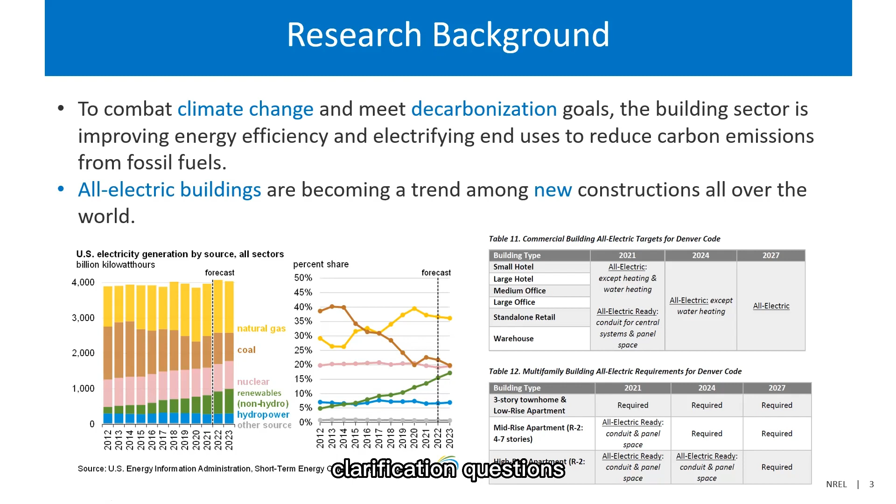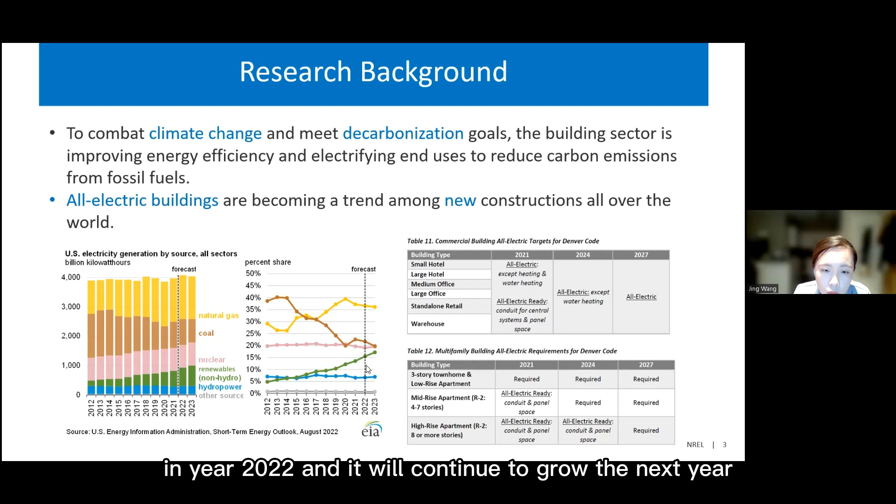So this figure on the left-hand side, from EIA, shows the short-term energy outlook, and it shows that the renewable energy for all electricity generation in the US is increasing every year, already 15% in year 2022, and it will continue to grow next year to almost 17%.

So if our buildings become more dependent on the electricity grid, then the emissions from the electricity used by these buildings will become cleaner. Therefore, the emissions will get reduced. That's the whole idea behind this electrification of the building sector.

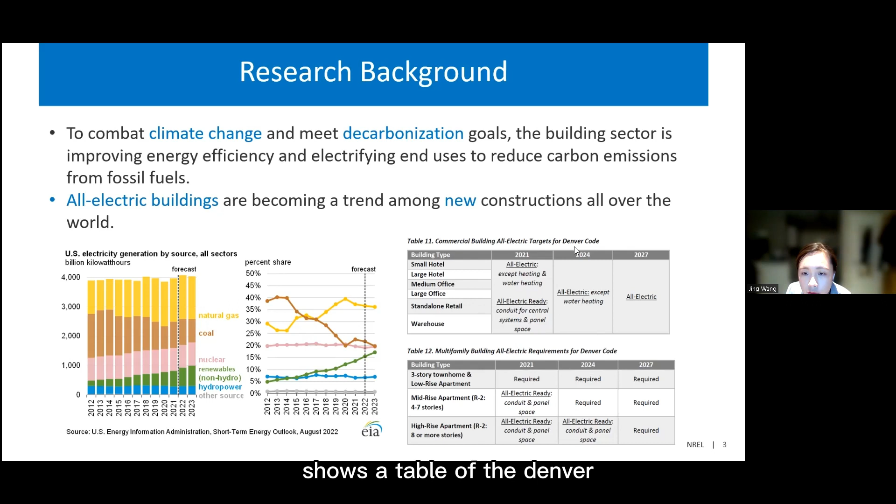So therefore, all electric buildings are becoming a trend among new constructions all over the world, not only in the US, but also in Europe and in China too. This shows a table for Denver, because NREL is located in Denver, Colorado. I took these two tables from the Denver code, and this shows by code regulation, in year 2027, almost all commercial building types need to be all electric.

And also for the residential sector, it's the same for multifamily buildings. So that really proves the trend of all electric buildings in the future.

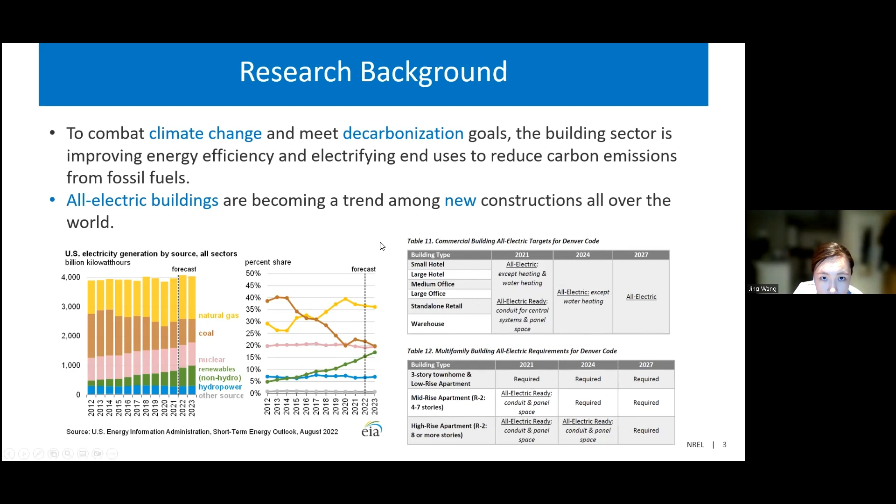This is the broader background of this work, because this work is part of the AUMC project at NREL. This AUMC project is to develop coordinated control of communities of buildings, fleets of autonomous vehicles, and intelligent infrastructures to maximize their operational value and contribute to the future grid.

In this project, we not only have the building part, building modeling and control, but we are also going to model and control the electric vehicles, the so-called EVs. And the distribution network is also under consideration.

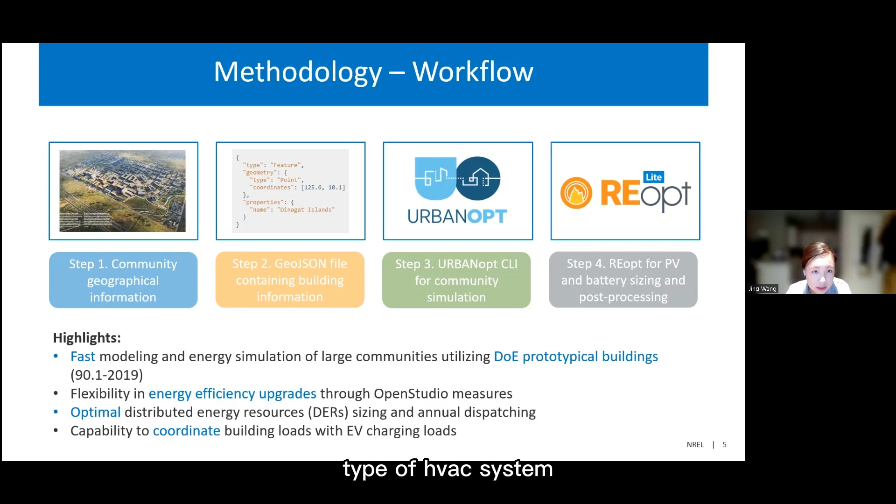The methodology of this work is pretty straightforward. The workflow we used to model this whole community, EVs, and distributed energy resources follows these 4 steps. The first step is we took the community geographical information, such as a map, and turned it into a GeoJSON file, which contains building information, including building footprint, building types, type of HVAC system, EV penetration at building level, and number of stories.

Such information for the whole community goes into this GeoJSON file, which can then be read by URBANopt. URBANopt is another urban scale energy modeling tool developed by NREL, and it takes this GeoJSON file and can do fast prototyping of the whole community, no matter how large it is. Then we get energy models for every building in the community, and we do annual simulation. The next step, we use REopt, another tool developed by NREL.

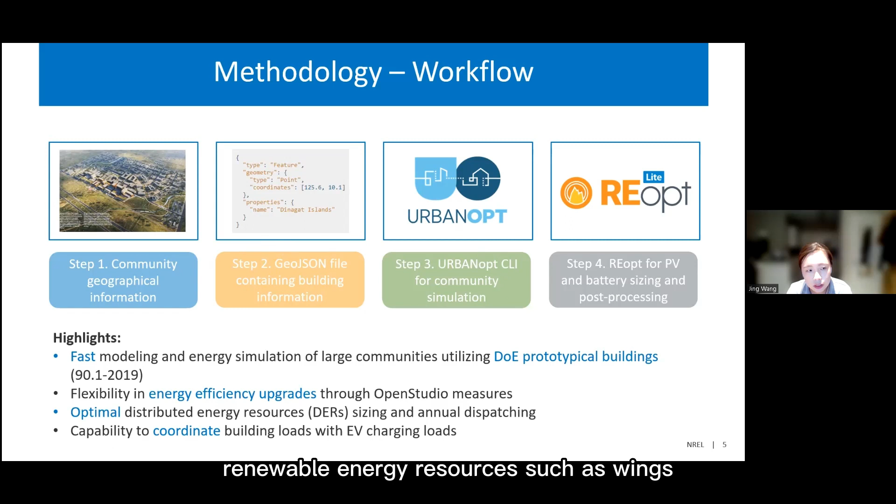This tool uses optimization to size PV and batteries and other renewable energy resources such as wind and local generators, things like that. And it sizes based on your annual energy profiles for you, and also provides optimal dispatching decisions based on your load profile.

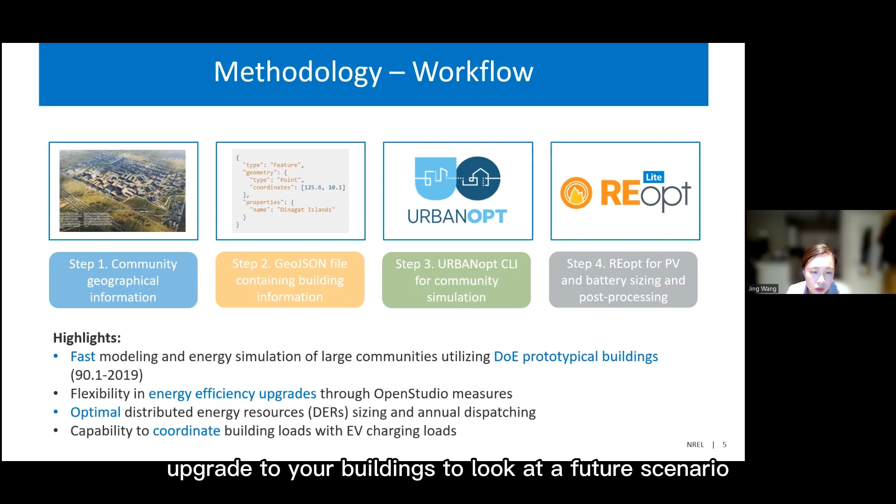So the highlights in this workflow: first, it's pretty fast. The modeling and energy simulation of any large communities can be really fast. And the core of URBANopt is utilizing DOE's prototypical building models, with the template being ASHRAE 90.1 2019, the latest prototypical building model. In terms of flexibility, if you want to apply energy efficiency upgrades to your buildings to look at a future scenario, you can easily implement those through OpenStudio measures, because URBANopt is based on OpenStudio.

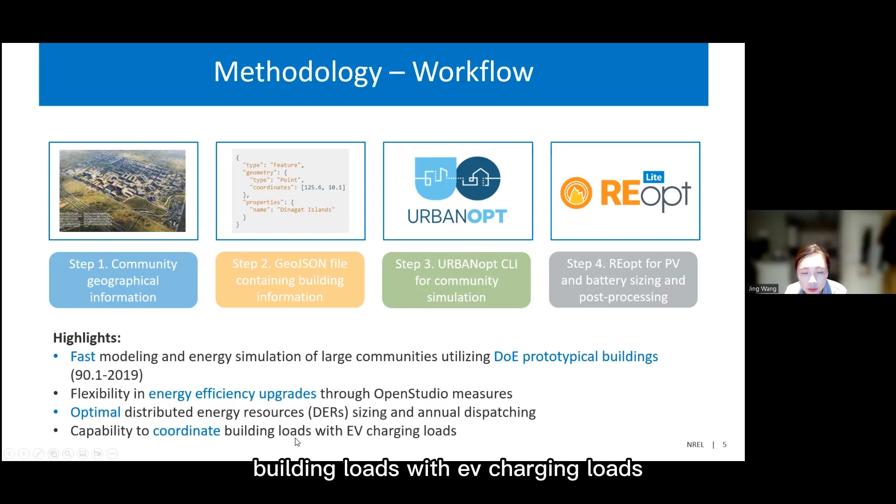And as I said, REopt does the optimal distributed energy resources sizing and annual dispatching for you. It also has the capability to coordinate building loads with EV charging loads, because all of these loads are modeled in the same platform, so it's fairly easier to coordinate those loads based on your control needs.

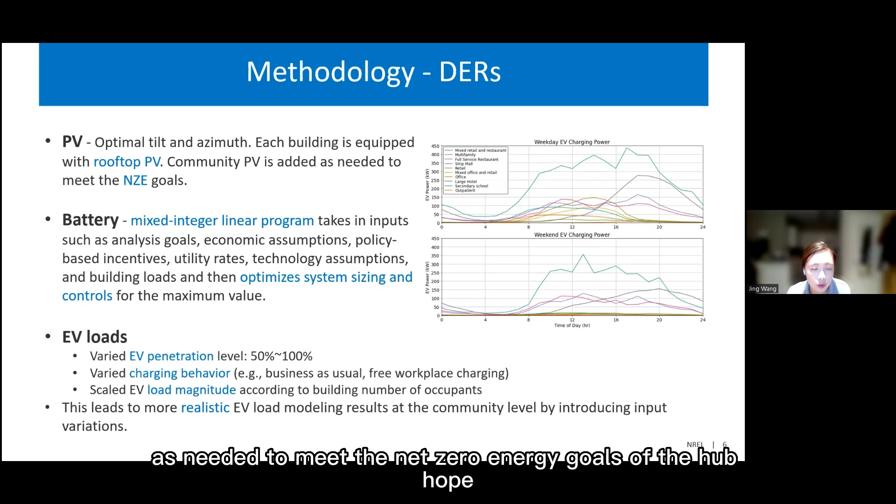This slide provides more details about how we model those DERs. First, PV - we used a tool to help determine the optimal tilt and azimuth for the community location, which is Denver. Each building, since this community is not fully constructed yet, we use energy models to represent and help us forecast the community energy performance. So we assume each building is equipped with rooftop PV, and community PV panels are added as needed to meet the net zero energy goals of the whole community.

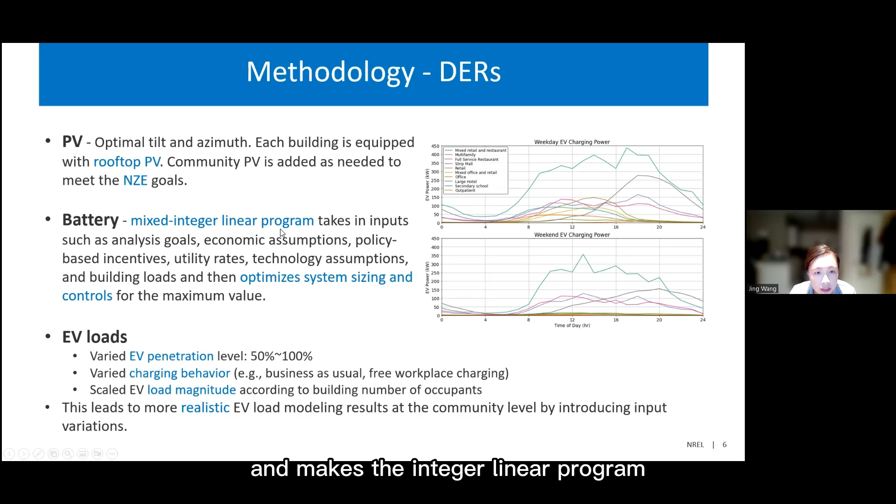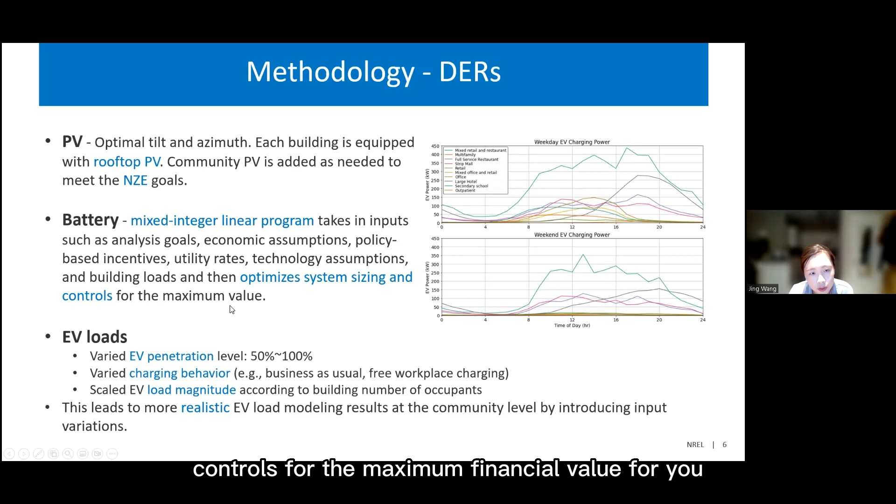And for the battery, we use REopt to size the batteries. REopt is a mixed integer linear program optimization program. It takes inputs such as analysis goals, economic assumptions, policy-based incentives, utility rates, technology assumptions, and your building loads, then optimizes your system sizing and controls for the maximum financial value for you.

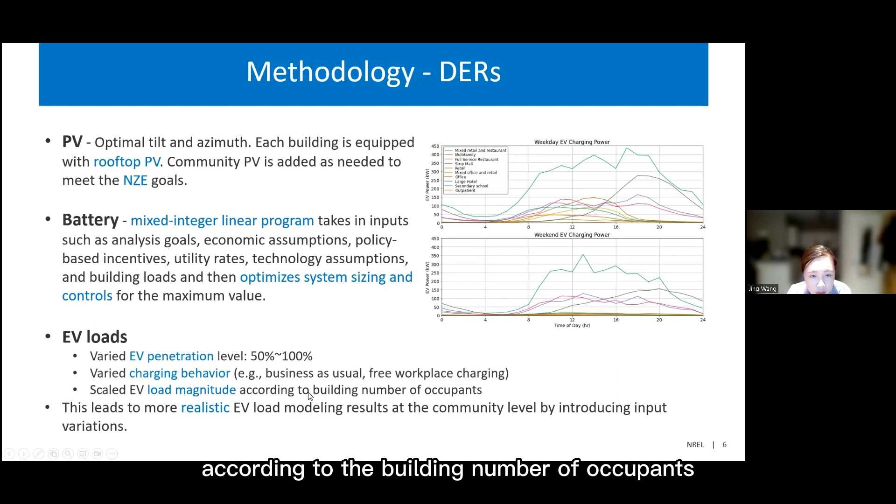In terms of EV load modeling, we varied the EV penetration at each building level. We assumed from 50% to 100% EV penetration, meaning if it's 100%, all the EVs parked at this building are electric - no gasoline vehicles. We also varied the charging behavior at each building: it can be business as usual or free workplace charging, with 3 different charging behaviors available. We also scaled the EV load magnitude according to the building's number of occupants - if the building has more occupants, we assume there are more EVs. This helps us create more realistic EV loads at the community level.

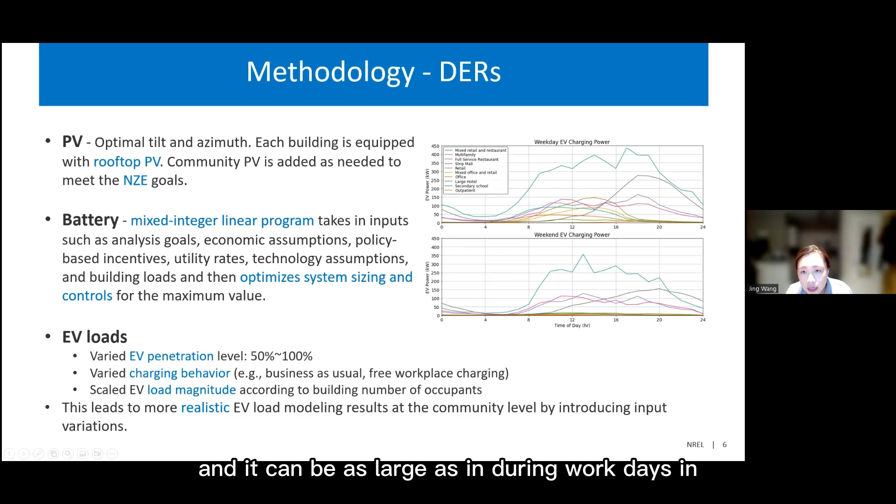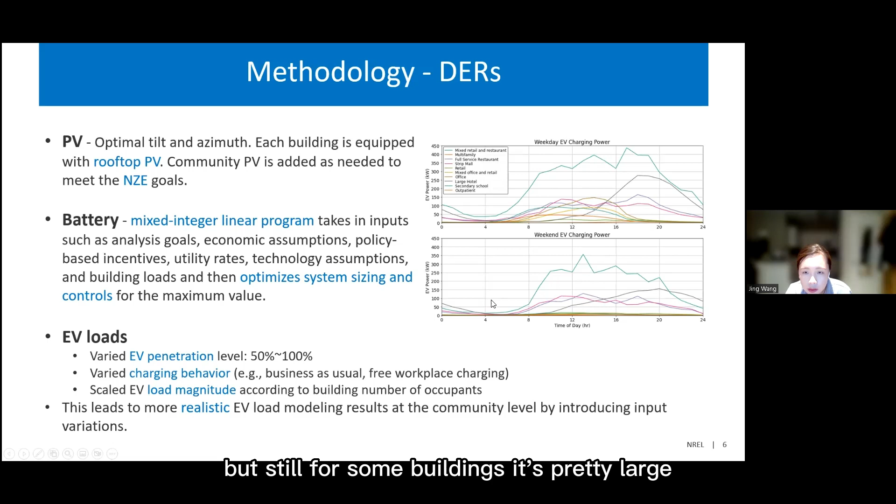This figure shows the EV charging power for some selected buildings. It can be large during work days - this is a mixed retail and restaurant building - as large as over 400 kilowatts for the EV load. For weekends, it can be smaller, but still pretty large for some buildings.

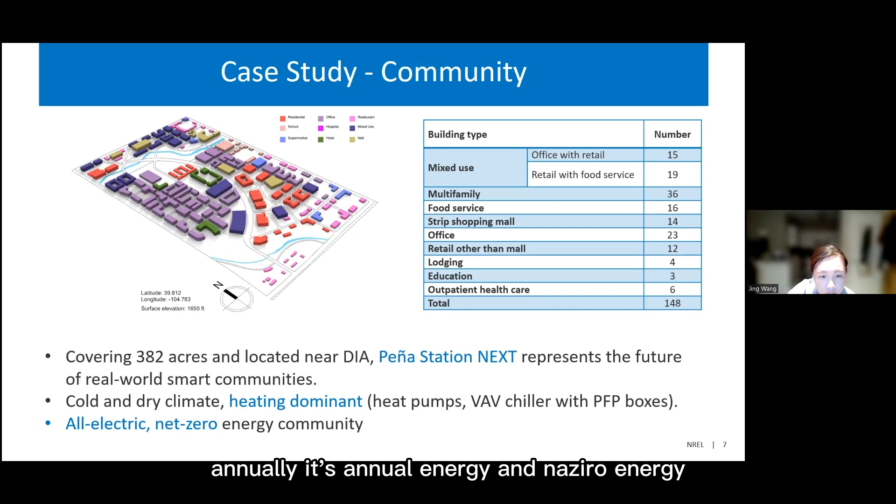We studied 5 different scenarios in this paper. First, we set up a baseline to represent the energy level in year 2020. Then on top of the baseline scenario, we applied some energy efficiency measures to represent a higher efficiency level in the year 2030. This is measured by comparing the EUI values of this scenario to the code required values of the Denver area in year 2030. That's how we set up this future scenario for 2030, which sets a baseline for the following scenarios.

On top of scenario 2A, we further added more community PVs to help the community reach net zero. Then on top of scenario 2B, we added some EV loads to study the impact of large-scale EV adoption on the community energy performance, including peak demand, energy cost, and carbon emissions. In the last scenario, we further added battery storage to help shift the loads and see how that affects energy performance.

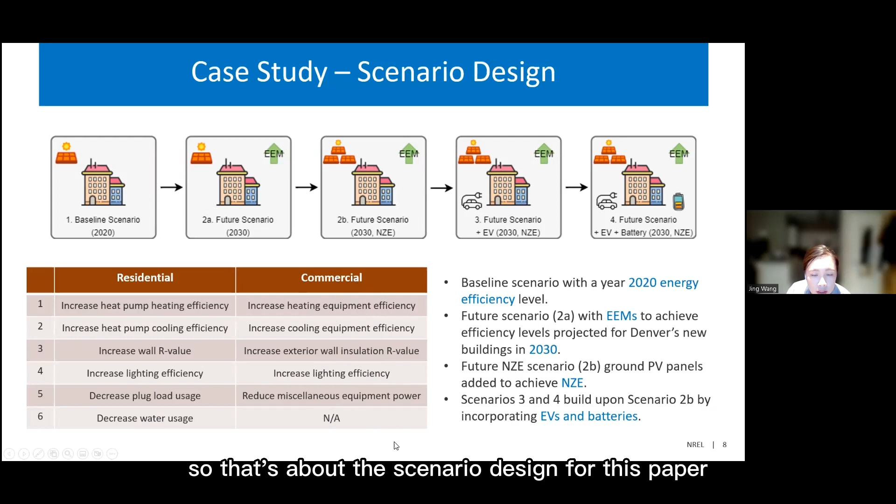Here's a list of the EEMs we applied in the residential and commercial buildings. Mostly they increase HVAC system efficiency, improve the building envelope, and use more efficient lighting and plug load systems, and decrease water usage. There isn't much water usage in commercial buildings, so we didn't include this for commercial buildings. That's about the scenario design for this paper.

For evaluation metrics in this paper, we used a pretty standard set. First, we used net electricity usage intensity, slightly different from traditional EUI—we used electricity usage intensity, not energy usage intensity, because we don't have much natural gas usage in this community, so we just considered electricity. It's net because we subtracted the PV generation from the total energy consumption to get a net EUI.

Annual energy cost is net metered because here in the US, if you have local PV generation and don't use it all up, you can export that excess PV back to the grid, and the grid will provide some incentive or money for exporting it back and helping make the grid cleaner. That price is pretty cheap, only about 1 cent per kilowatt hour, so it's not a lot, but we considered net metering.

Peak demand is another evaluation metric showing how this community impacts the grid at the distribution network level. For annual operational carbon emissions, we didn't consider embedded carbon emissions—only those induced by the building consuming electricity from the grid. It's calculated by multiplying your time-varying carbon emission intensity from the grid with your time-varying grid power and your time step, which adds up to annual operational carbon emissions.

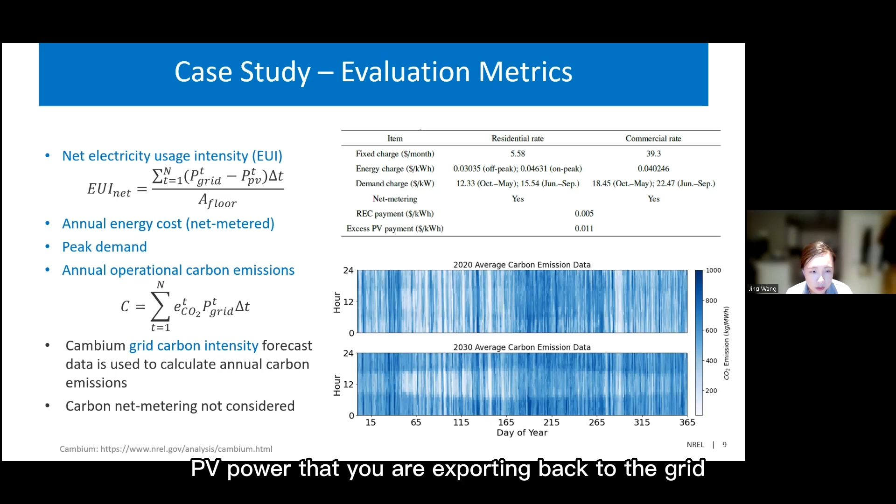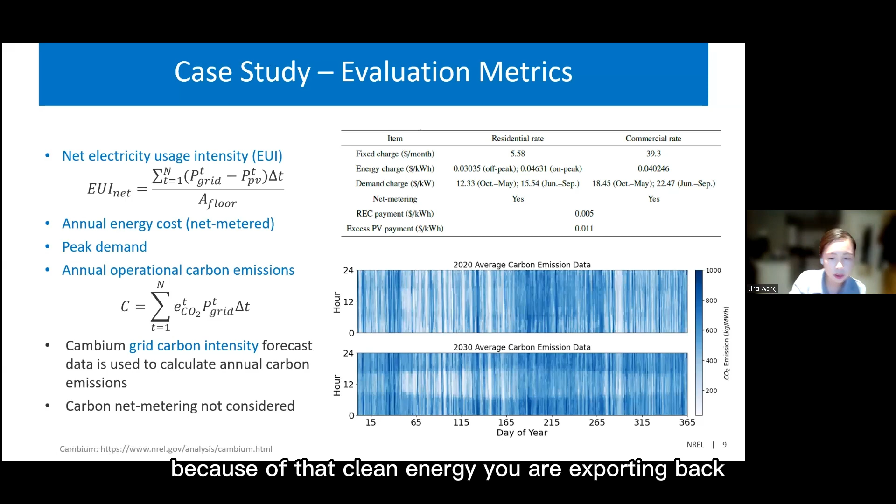Another thing is that we didn't consider carbon net metering. That means for the PV power you export back to the grid, you don't obtain a carbon emission offset due to that exporting. So even though you're obtaining money from the grid, you're not obtaining an emissions benefit from the grid because of that clean energy you're exporting back. That's just another assumption we made.

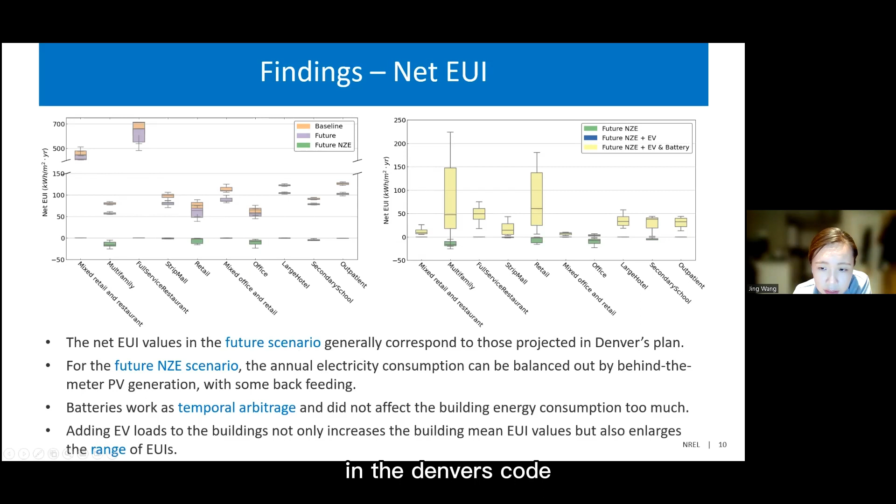So, findings. The first finding: we looked at the net EUI values of the 5 proposed simulation scenarios. When looking at this figure, the first thing we noticed is that the net EUI values in the future scenario, shown as purple boxes, align with those projected in Denver's code. That means we did a great job matching that code and setting up this baseline for the other scenarios.

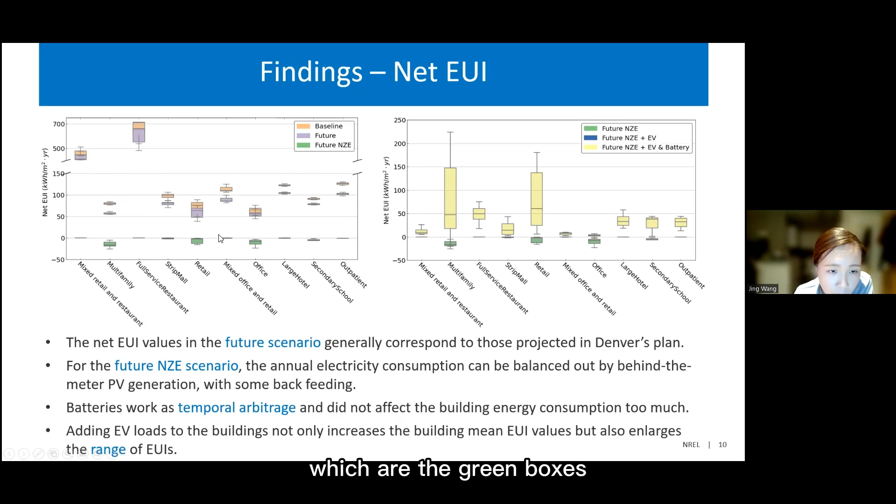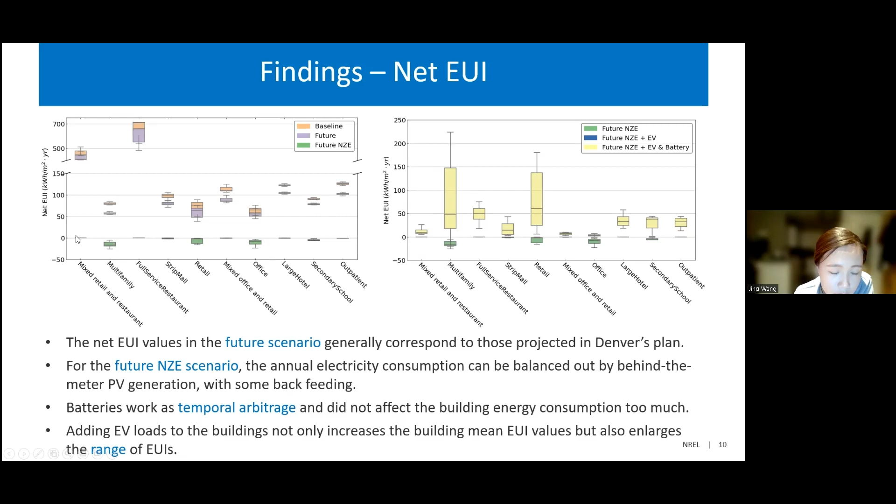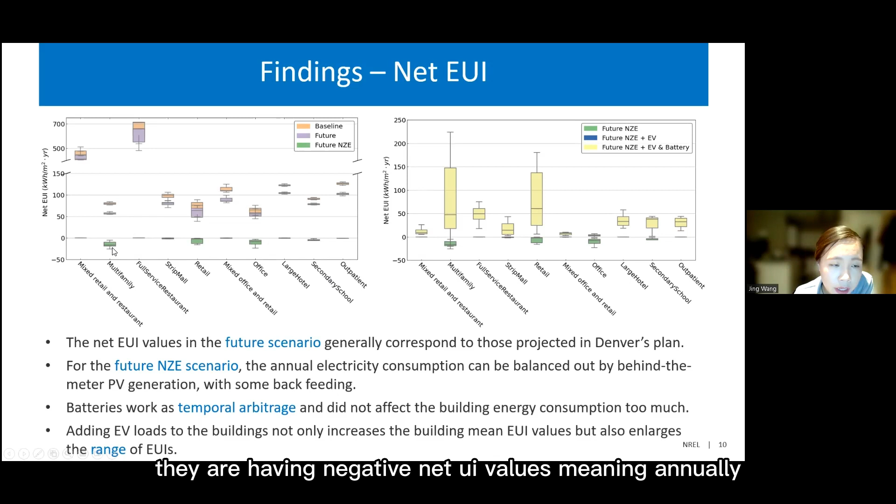For the future net zero energy scenario, shown as green boxes, they were designed to be net zero, and we see from the green boxes that annual net zero energy is achieved. In some building types, for instance multifamily, retail, offices, and schools, they have negative net EUI values, meaning annually they export more PV back to the grid than what they consume.

When looking at this figure on the right, we see that the blue boxes and yellow boxes overlap with each other—the blue boxes are basically hidden behind the yellow boxes. That's because the batteries only work as temporal arbitrage, so they don't really affect the building energy consumption by too much.

Lastly, when looking at these yellow and blue boxes, we see that adding EV load to the buildings will not only increase the building mean EUI values by a lot—in some buildings it's a lot—but it also enlarges the range of the distribution of the EUIs.

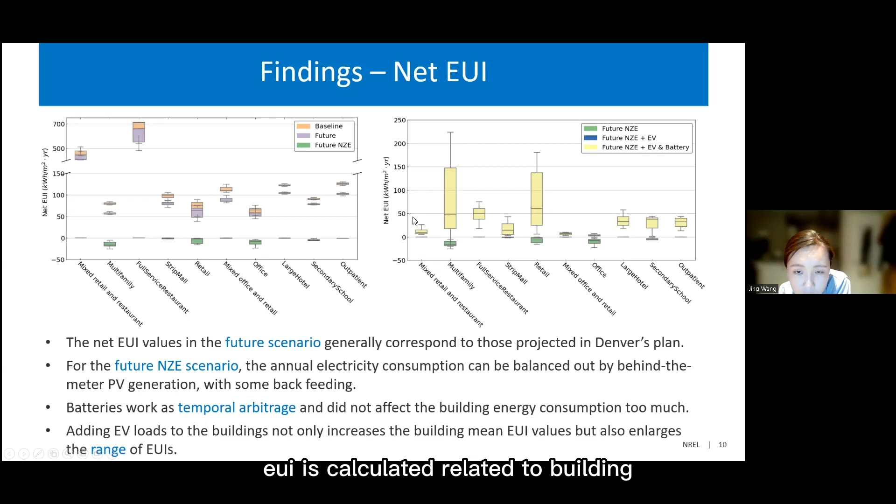For clarification, we have 10 buildings in the community, and these plots are the mean values by building type. So if we see a larger range of the EUIs, that means for this building type, the EUI distribution is more scattered. That's because EUI is calculated relative to building area, so for larger EV loads, if divided by different building areas, the range becomes really scattered.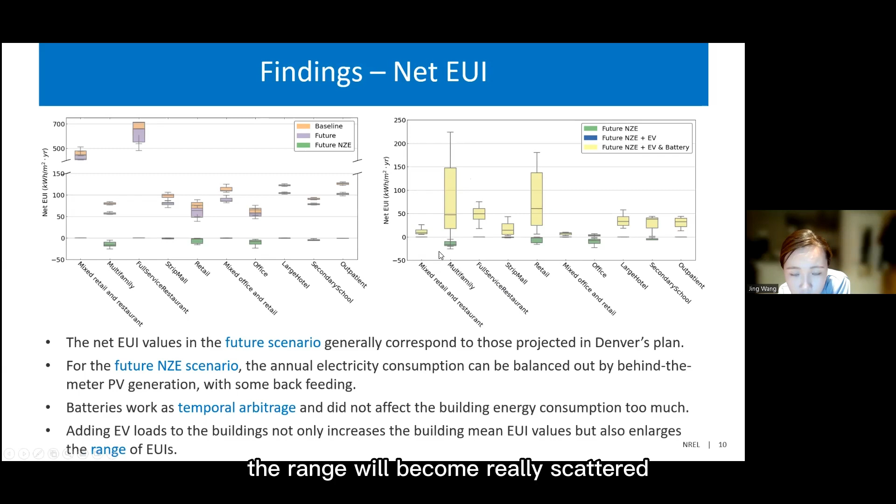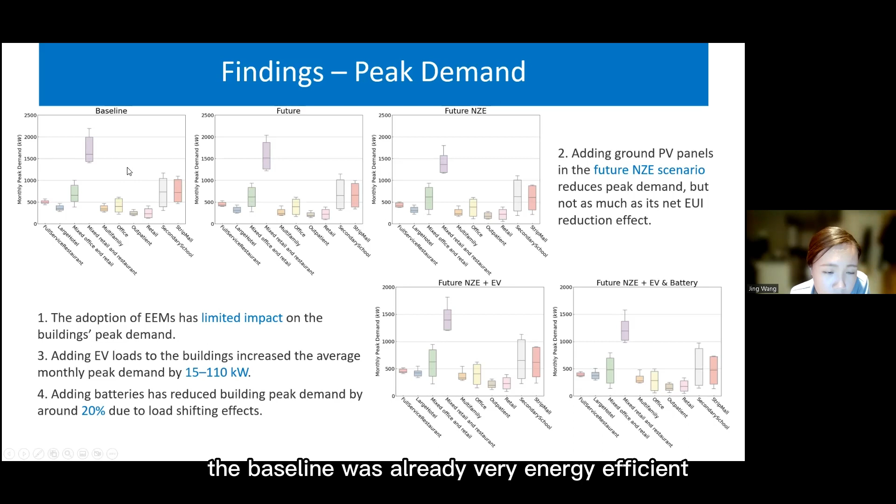Next we looked at peak demand performances of this community. The first finding is that when comparing the baseline and the future scenario where we only changed a few efficiency measures, there's really only limited impact on the building's peak demand. That's because the baseline was already very energy efficient, so adding more efficiency measures didn't impact peak demand by a lot.

Another thing is that we didn't implement any control in the EEMs. For instance, we didn't do any load shifting in response to grid signals, so that's why we see very limited impact on peak demand. Based on that, we can say for highly efficient buildings, applying control-related measures such as load shifting will have higher impact on the building's peak demand than traditional energy efficiency upgrades.

Secondly, comparing the future and future net zero energy scenarios, we noticed adding the ground PV panels in the future net zero energy scenario reduces peak demand, but not by a lot. In some buildings, we don't see too much peak demand reduction.

When we plot the detailed power curve of each building, we see that the PV generation mainly is focused around noon. But for the large commercial buildings, the building peak occurs during the morning when people start to go to work, and that just doesn't align with when the PV peaks. That's why adding extra PV offsets a lot of energy consumption but doesn't help reduce your peak demand by a lot. That's the so-called very famous duck curve, if you know what I'm talking about.

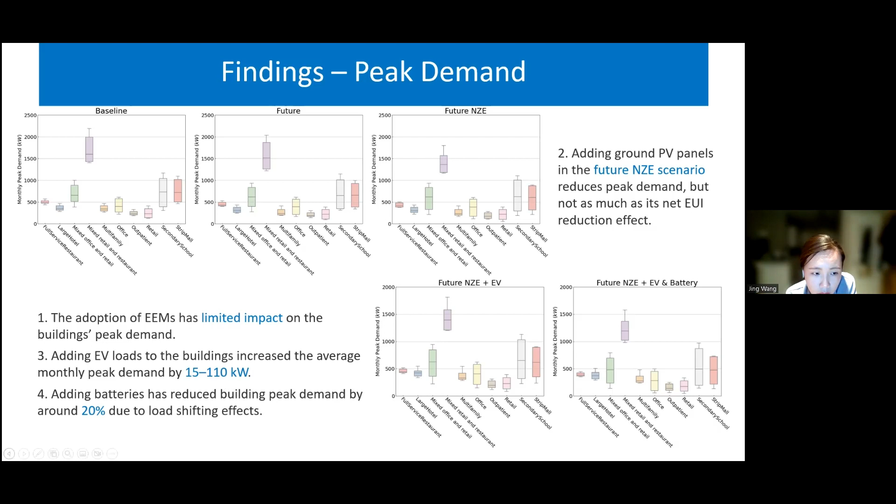And adding batteries has reduced the building peak demand by around 20% due to load shifting effects.

For annual carbon emissions, we generally see very similar trends across different scenarios and across different building types. We see 7 to 24% of emission reductions from the baseline to the future scenario. Then we see a larger reduction from the future scenario to the future net zero energy scenario - we see the most reduction there, reaching 40% for some building types.

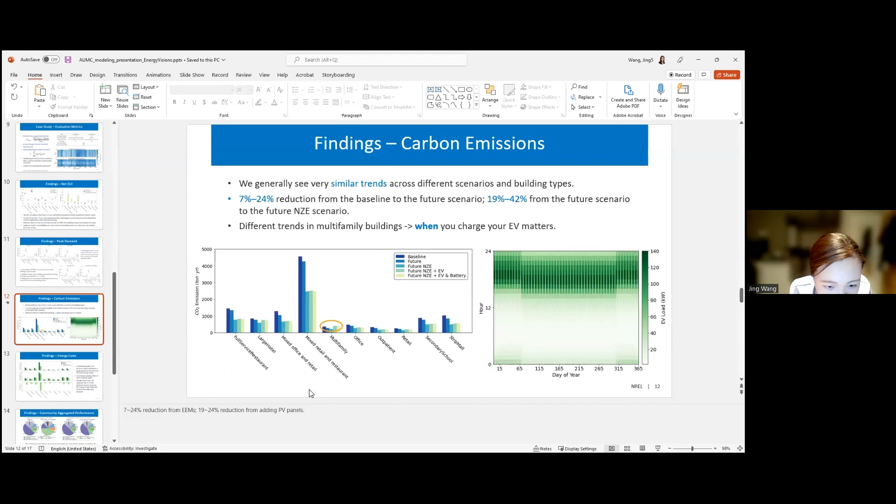Let me check my notes. Yeah, that's from adding the PV panels from this scenario to this scenario.

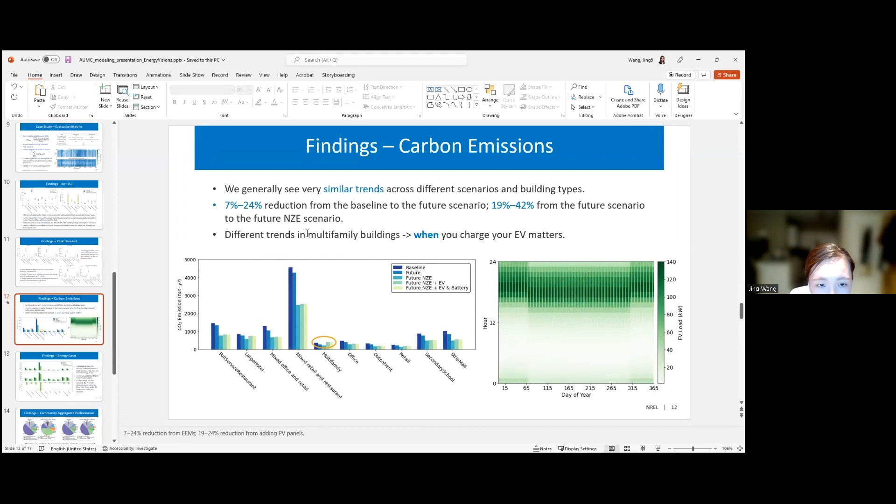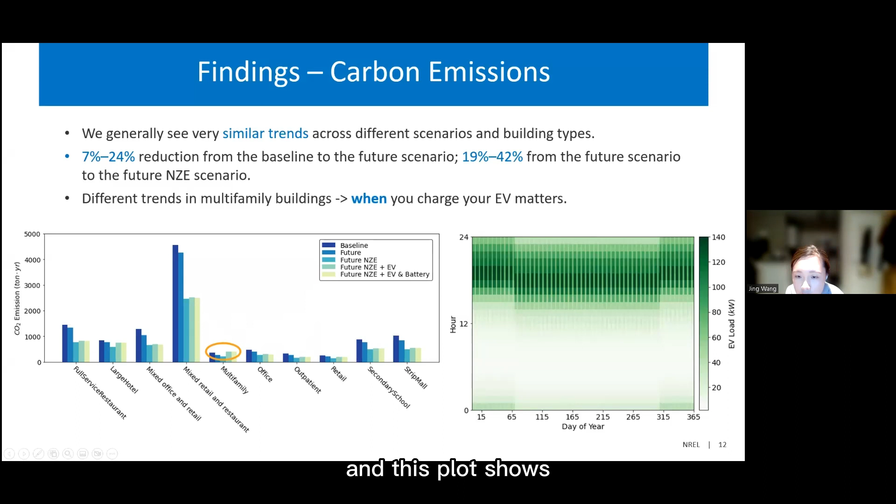For one building type, we see a slightly different trend - that's the multifamily building that I circled here. We see that after adding EV loads, the total emissions exceeded that from the baseline scenario, which we didn't see in any of the other building types. That's because in multifamily buildings, most people charge their EVs after they get back home during the night. This plot shows the EV charging loads of the multifamily buildings, and we see that it peaks mostly

during the night when power plants are less clean, and that's when you charge your EVs. So that's why we see a jump on buildings. With this, we can say when you charge your EV really matters in terms of carbon emissions.

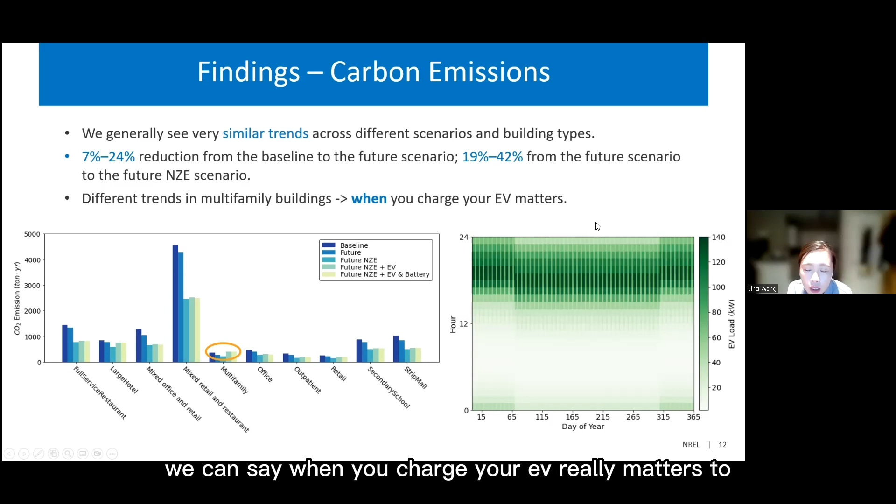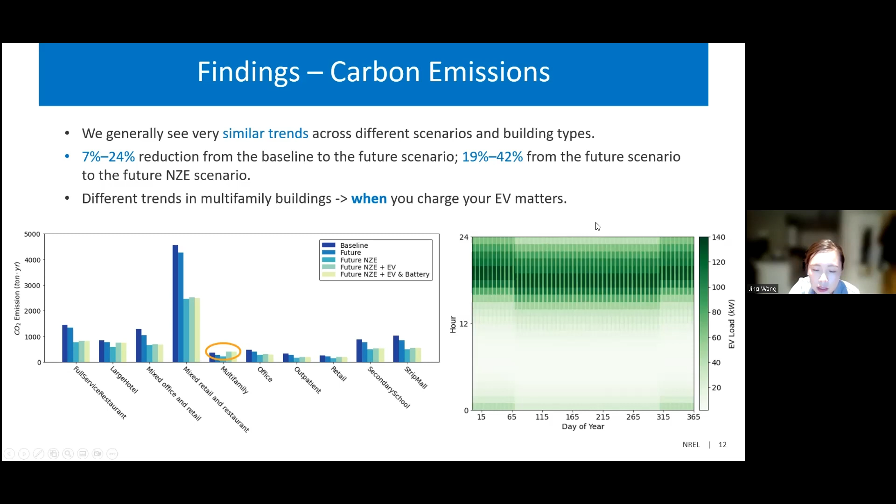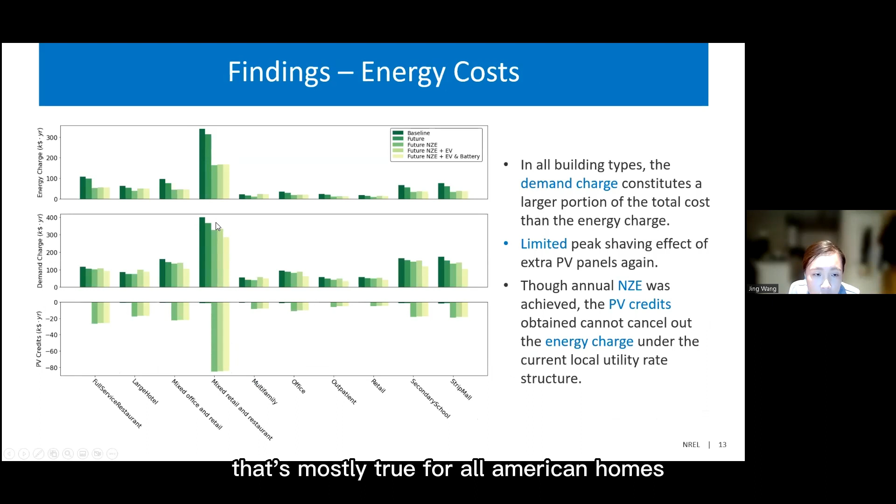Looking at the energy bill, there's the demand charge and the energy charge, and that's mostly true for all American homes, because demand charge has a higher rate than energy charge. We see limited peak shaving effect of extra PV panels again, because of the misalignment between the PV generation and when the peak happens. So adding PV panels didn't help reduce your peak demand charge.

Lastly, when we look at the PV credits each building obtains, although those large commercial buildings are exporting a lot back to the grid, the PV credits they obtain cannot cancel out the energy charge under the current local utility rate structure. This means a longer payback period for adding PV panels to your building, at least under the current utility rate structure.

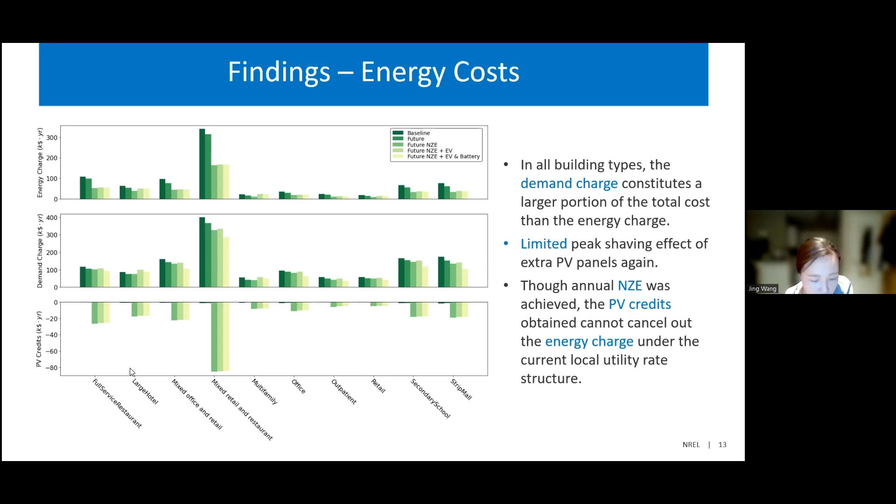And the last 4 to 5 slides, we are looking at the energy performance of each building type. Now we take a look at the community aggregated performance.

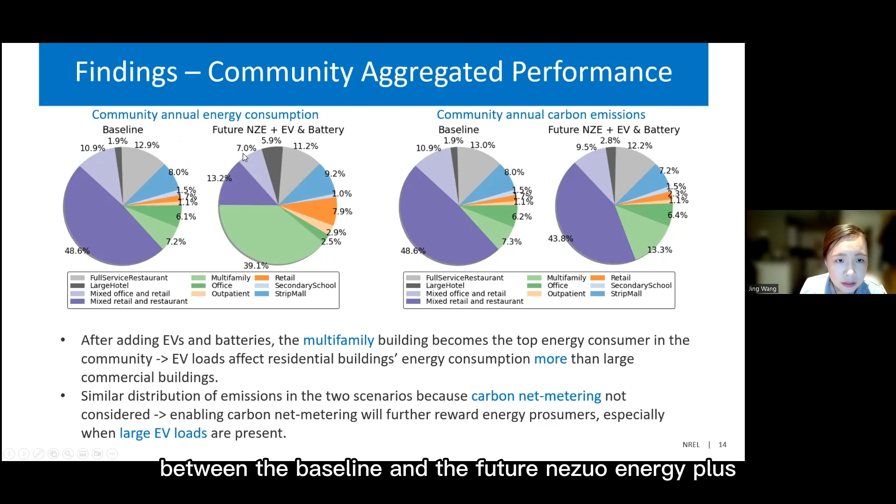This figure shows the community annual energy consumption compared between the baseline and the future net zero energy plus EV plus battery scenario. And this shows the annual carbon emissions distribution among building types.

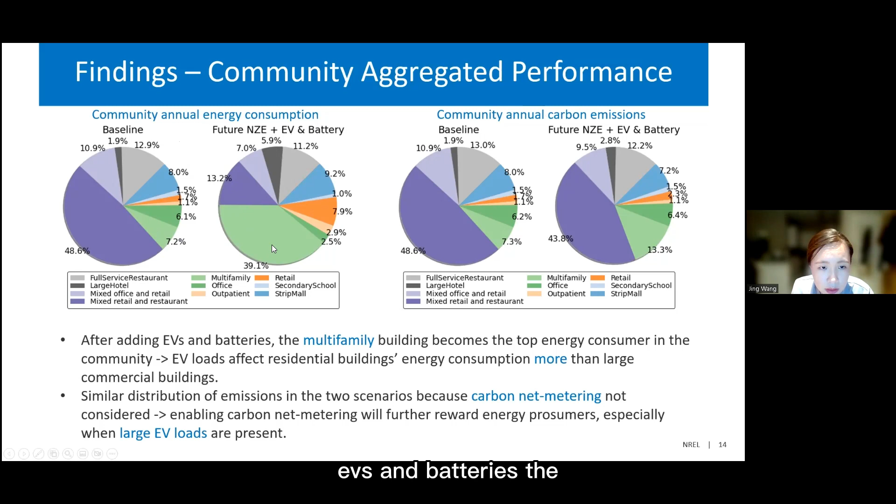So when we look at this figure, we see that after adding the EVs and batteries, the multifamily building, the light green one, becomes the top energy consumer in the community.

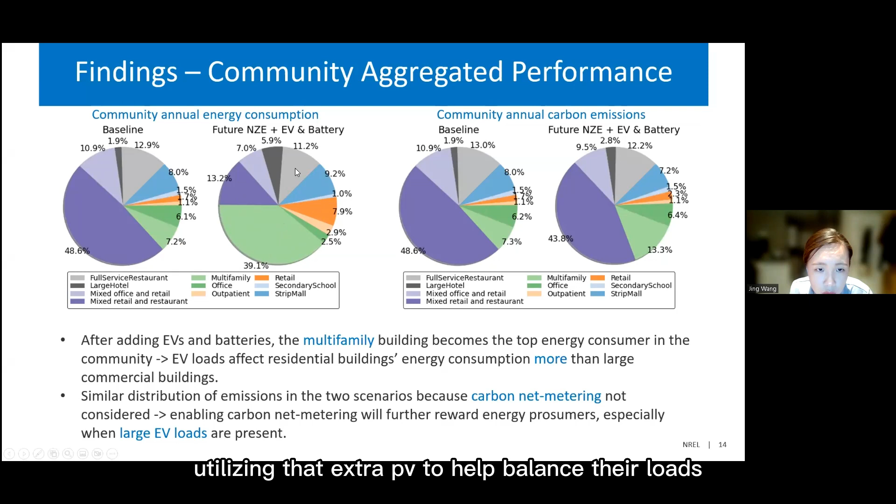That's because the EV loads affected the residential buildings' energy consumption more than other larger commercial buildings. So when other buildings are utilizing that extra PV to help balance their loads, residential buildings didn't, because the EV loads are too large - they cannot cancel out those EV loads using the limited PV panels. That's why they became the largest energy consumer in this future net zero energy plus EV and battery scenario.

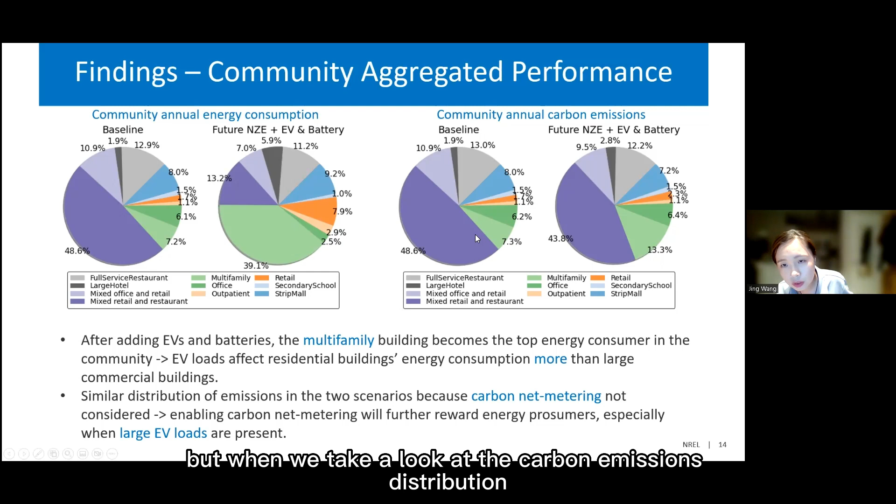But when we take a look at the carbon emissions distribution, we see that the two pie charts are almost the same. The same distribution is seen in the baseline and the future net zero, EV and battery scenario.

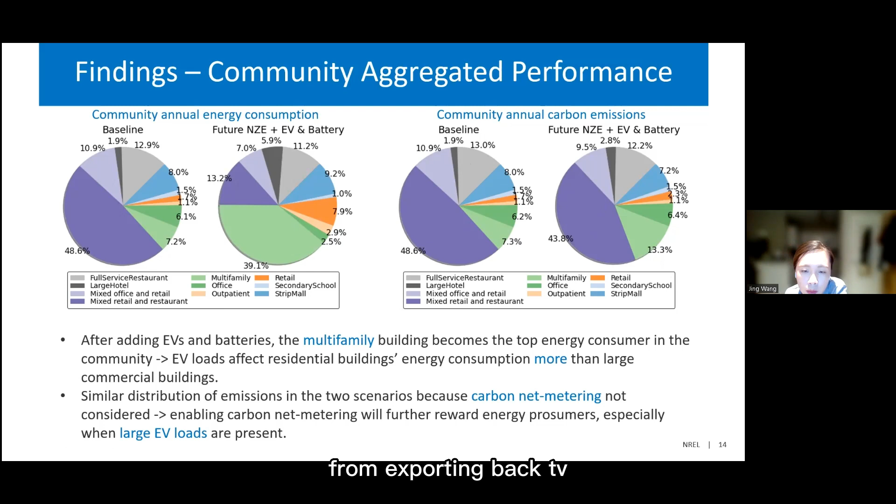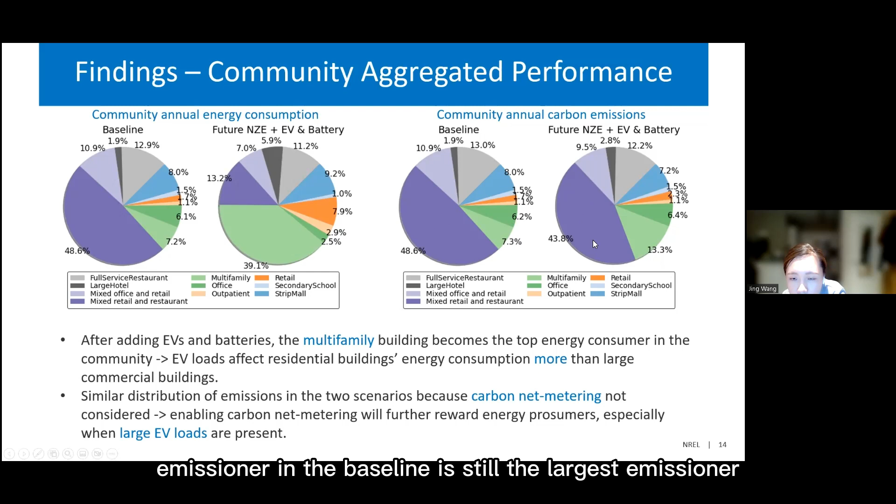That's because, as we mentioned before, we didn't enable carbon net metering in the future net zero energy community scenario. So those large commercial buildings will lose that benefit from exporting back PV. That's why the largest emitter in the baseline is still the largest emitter in the final scenario. So enabling carbon net metering can further reward energy prosumers, especially those large commercial buildings with large EV loads.

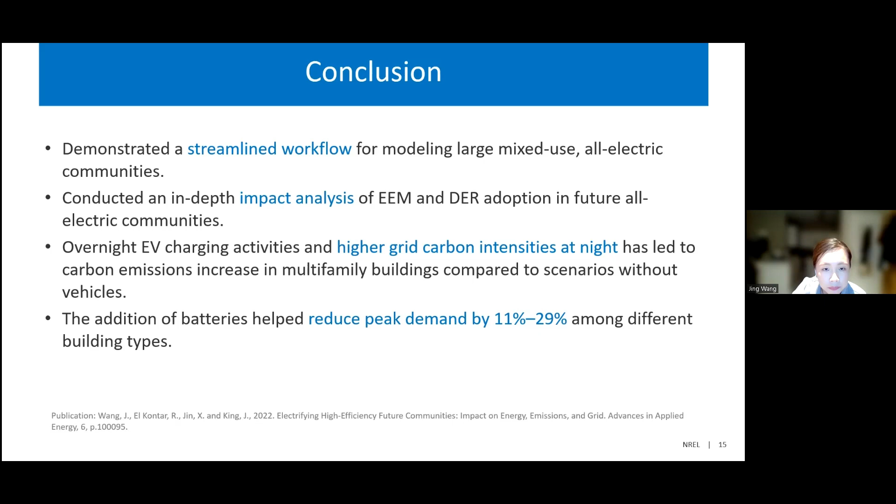And I have one more slide. This was not included in the journal article, but this is our ongoing work, and it has recently been published in the ACEEE conference. So I wanted to introduce a bit about this ongoing work.

Sorry, that's my dog. So in this work, we did carbon responsive EV control.

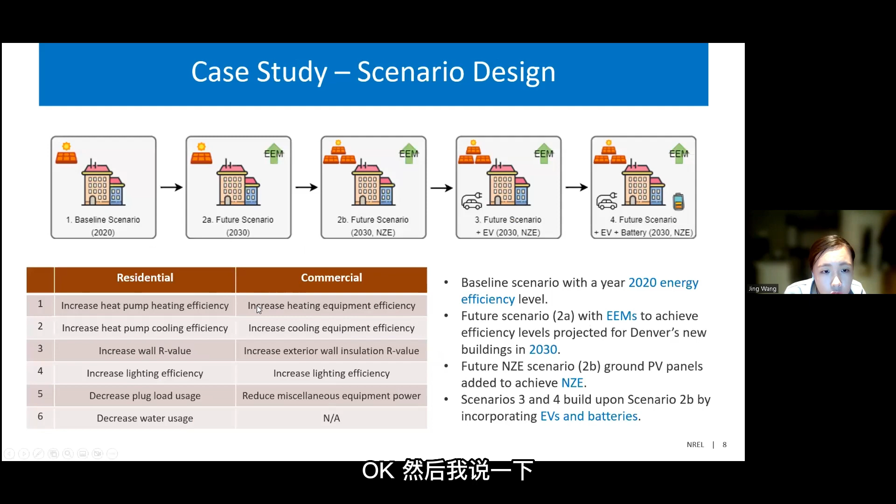So the idea is that we charge the EVs more when the grid is cleaner, and we charge less when the grid is less clean.

And because it's rule-based, we tried different sets of thresholds. These thresholds are like when the intensity is above 60% of the data points, it's considered unclean. When it's below 40%, it's clean, and between them it's default.

And we tried to include or not include compensation before departure - that means whether or not to compensate for your EV curtailment during the last 2 hours before your EV departure. The last variable is that we tried to include or not include the charging power limits of the EV. When we don't consider charging power limits, we assume it can charge as much as it wants, but this is not realistic because charging power is limited by your charger power.

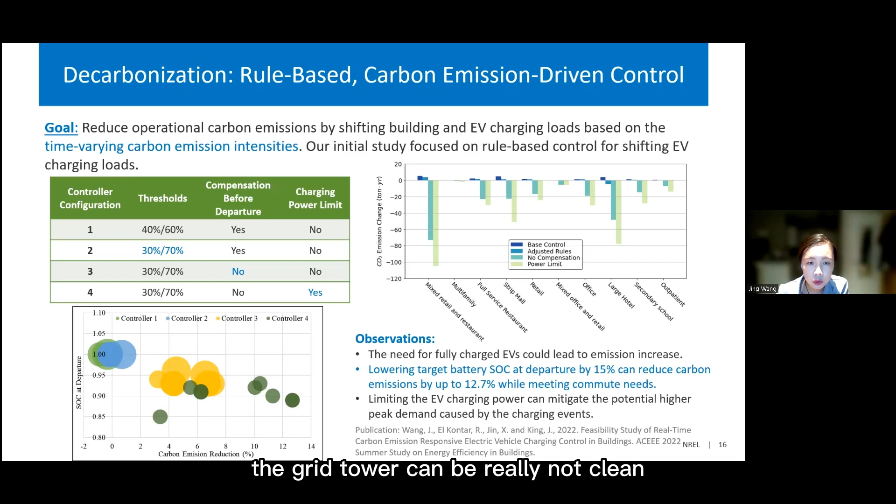Some observations: first, in controllers 1 and 2, we actually saw emissions increase compared to not implementing any control. That's not what we want, right? That's because we had this compensation before EV departure, and during that last 2 hours you are charging a lot - shifting your EV load to those 2 hours, but those 2 hours can have really unclean grid power. That's why we're seeing this emissions increase, and those are not good controllers.

In controllers 3 and 4, we didn't include last-minute EV charging compensation, and we finally saw some EV emission reductions. Another thing is that the need for a fully charged EV battery can lead to emissions increase - for these 2 scenarios, we had the EVs leaving with a full battery.

But for these 2 scenarios, when we looked at the state of charge, we see they might not have a full battery - they might have the battery charged to 85% or 90%, which can be enough for you to go home and conduct your everyday activities.

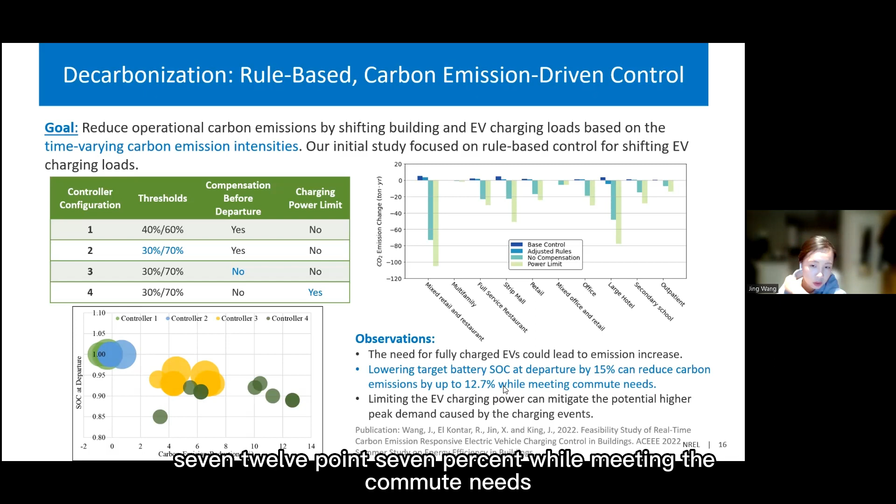But sacrificing up to 15% of SOC can reduce carbon emissions by up to 12.7% while meeting the commute needs. That's why some charging companies are encouraging people not to charge to a full battery, but to charge to like 80-90%. That can not only save your money but also have positive environmental impact.

And in this figure, we show an almost linear relationship between the carbon emissions reductions and the EV SOC at departure, as I said - the lower the SOC, the higher the carbon emissions reductions because you are charging less, right?

Limiting the EV charging power in controller 4 can mitigate the potential higher peak demand caused by the charging events, because we're seeing higher peaks in those controllers when we didn't have a power limit, induced by the load shifting.

Yeah, that's it. That's all I have today. I'm open to any further questions.

Okay, thank you very much. I think Dr. Wang drew a very broad, detailed and very practical picture for the future net zero carbon emission work. I think it's very interesting and very good work. For time's sake, maybe one or two questions - please just raise your question in the text box.

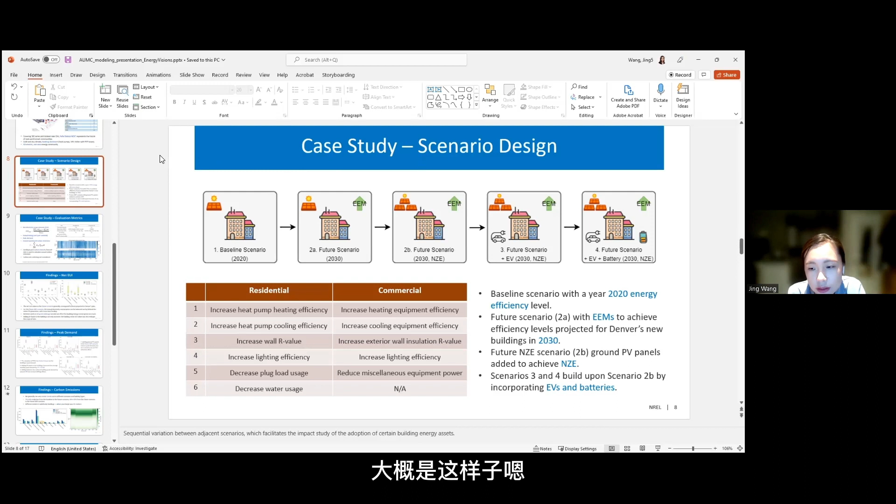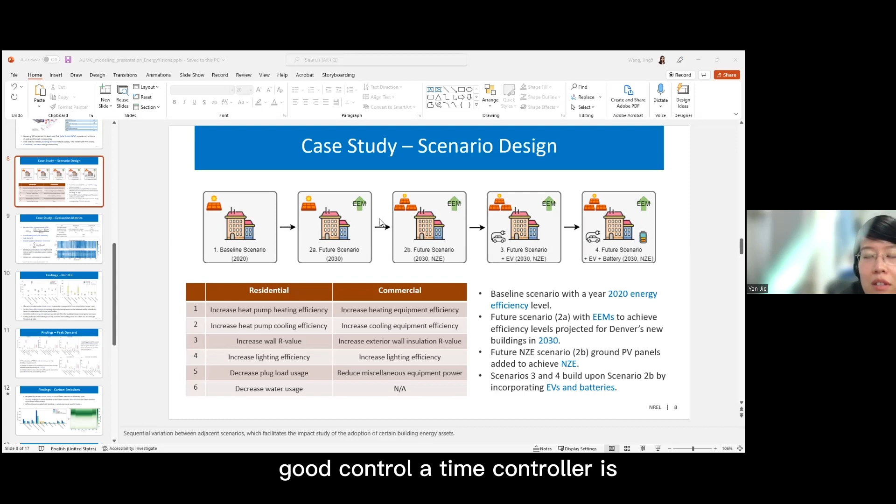Okay, thank you. I think we are good. The time controller says it's just 10 a.m., 10 o'clock.